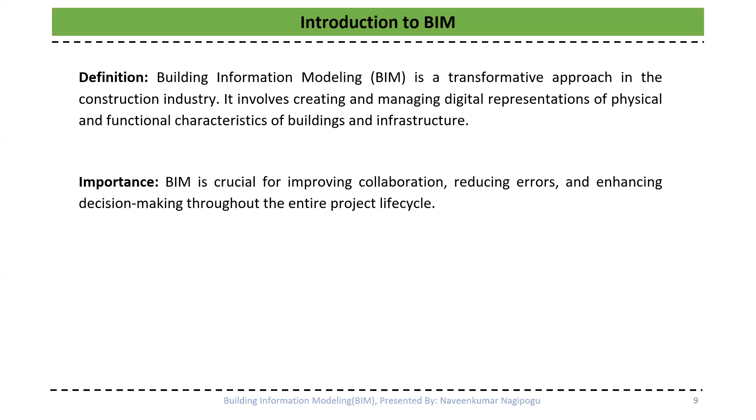So now let's come to the evolution of BIM. How did BIM get started, when did it start, and how is it getting adopted by the industry? In the 1970s itself, the word BIM was coined, it got started. But in the early 2000s, the popularity came. Why and how? Because of the intelligent 3D software, Revit. Autodesk people really did so many improvements to the Revit software. So many people adopted Revit as a building information modeling software, and they started working on it and were able to see the results. There are so many other software I will show in later slides, but it's because of intelligent 3D modeling software that BIM got popularized.

BIM is actually a subject, remember. BIM is a subject and a process which makes use of so many tools, technologies, etc.

And now BIM is widely adopted by so many countries. India is the pool of talent when it comes to BIM. You check out North America, UK, USA, UAE, London, and Sweden, the Nordic countries, Ireland - everywhere, Indian people are working on BIM projects.

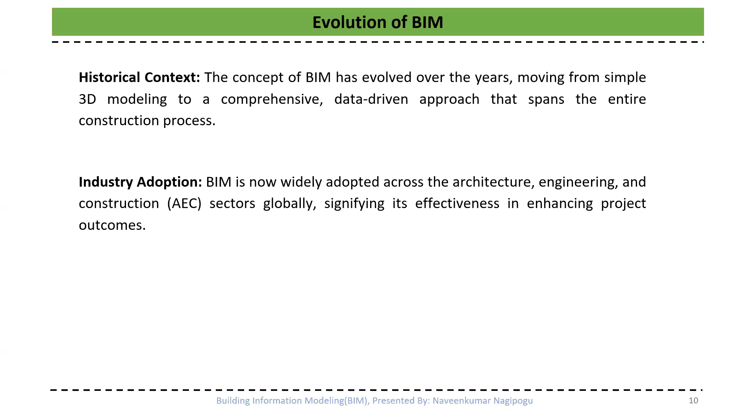Let's move forward, I will explain more. When it comes to key components, BIM is a process - what's included in the process? 3D modeling. The first job in developing the 3D model for BIM is to figure out what the project is, what the requirement of the project is, and who are all involved in the project. After that, we start working by building a 3D model. That is the first thing, the 3D modeling is the very first step.

Once the project is accepted and the project proposal acceptance is received, then comes collaboration. People will be able to work together on a single shared file, no matter if you are in Andhra Pradesh, Telangana, Kolkata, Delhi, BITS Pilani, or IIT Bombay. You can work on a single shared file so you can see what other people are doing, and also sync your live changes to the model with the other team members.

Data management, simulation and analysis, documentation - when it comes to documentation, it is once again very important. In a traditional way, how do people generally do documentation? Typing in a Word file, extracting Excel sheets, drafting and designing on CAD - so much time consuming. We are in 2024, and 2024 is also going to end, we'll be jumping into 2025. We should be equipped with the latest tools and technologies. It's a very sophisticated world now. Hyderabad is not the same as it was 30 years or even 10 years ago. You are able to see the change, right?

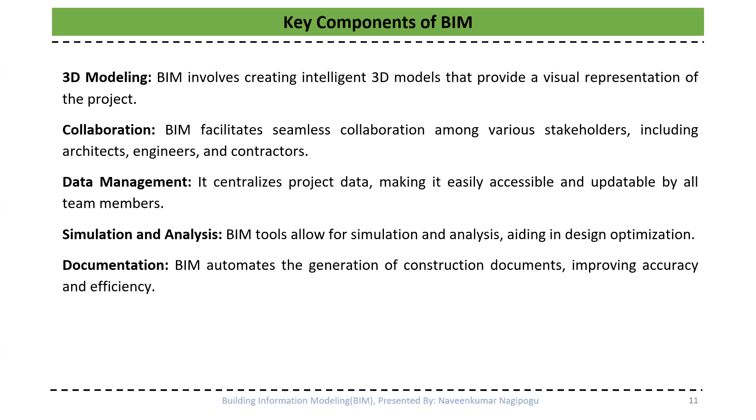See, BIM is also about the time period. It has been evolving and evolving. Let's move forward.

When it comes to BIM and architects, architecture people—say, diploma in architecture or a bachelor of architecture—generally they are designers by inbuilt design. They work with a lot of tools and technologies. Primarily they work with CAD, Figma, Photoshop, Rhino, Revit, and many other tools in the market. BIM helps them do their work in much less time, using the latest tools and technologies like generative design.

We just have to give the inputs: how I am expecting the inputs, what are the constraints, what are the terms and conditions. Once you give the data, the system will generate the layout—this is your hall with this much area, this is your bedroom, this is your puja room, and this is the elevation, this is the utility area, this much space is occupied by furniture, etc. Automatically it will pop up, and we can modify accordingly as per our convenience.

That is design optimization and visualization.

We are all human beings, right? There is a difference between reading and understanding, and watching and understanding. Any doubt?

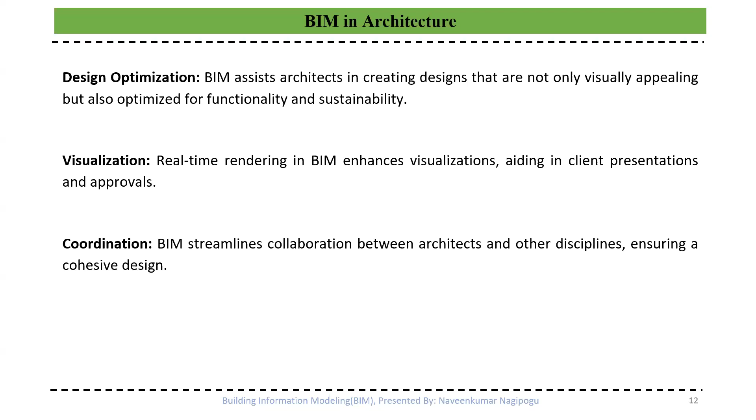When it comes to engineering, the same thing applies. We have scope for structural engineers, mechanical, electrical, plumbing engineers, and sustainable professionals in the case of energy analysis.

When it comes to construction, project planning—what do you know about project planning? I hope you might have studied it in your BTech civil engineering. I also studied it, but unfortunately did not learn any planning software. The traditional software is Microsoft Project, a very nice software, but I couldn't learn it in academics. Now every day I see schedules prepared in MSP, Microsoft Project, Primavera P6, Asta Power Project. Once you jump into the industry, you will learn everything—no issue at all. But my point is, you should have exposure.

What is industry? What is there in the industry? What skills are needed to get into the industry? This is very important—otherwise there will be no difference between a knowledgeable person and just a graduate.

Let's move on. Cost estimation—there are so many tools and technologies to extract the cost within a few simple clicks. Then site logistics—you can track everything happening at our site.

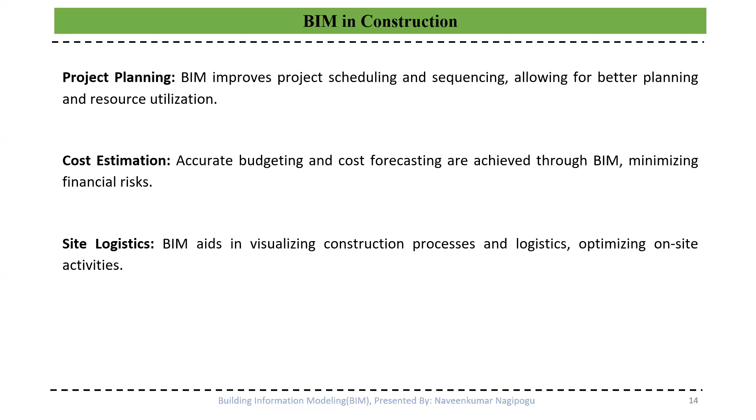Facility management is a very important area and it is coming up. Facility management is nothing but—once you plan, design, and construct a building or built asset, people are going to occupy and live inside that building or asset. Every day they should feel fresh air, they should breathe nicely, they should have proper ventilation, heating, ventilation, and air conditioning, and they should not feel suffocation. Their fan in the room should work well, the air conditioner should work well, the refrigerator, etc.—so we can track each and every asset and improve performance in terms of operation and functionality. This asset information modeling or facility management comes under some chapters, I can say—somewhat advanced. But first BIM comes, only then facility management comes.

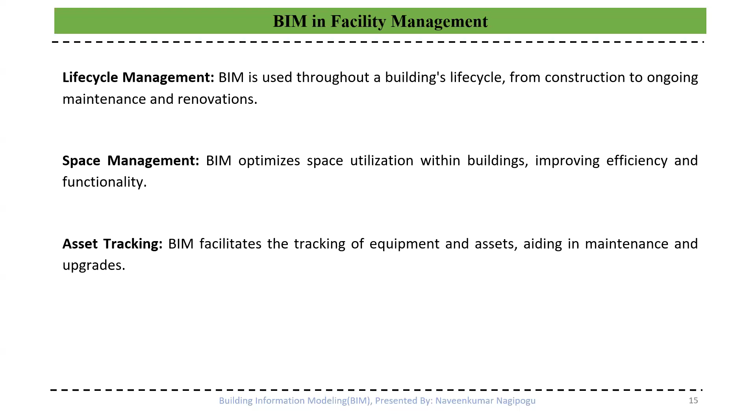Now let's come to our favorite topic: career opportunities. In our BTech civil engineering or architecture, there are so many specializations—like structural engineering, geotechnical engineering, rock mechanics, transport engineering, pavement engineering, marine, etc. There are so many things.

So if you enter into BIM, you can work with so many disciplines at the same time, because BIM is everywhere, in every branch. If you want to get into buildings and infrastructure, you can take up Revit. If you want to jump into infrastructure only, then you can take up Civil 3D or InfraWorks projects. There are so many things—I will show in the later slides.

Primarily, the one who wants to start their career in BIM will first start with the role of BIM modeler. The job of a BIM modeler is the company will give you inputs in a PDF or a 2D CAD, and you have to develop a 3D model out of that. Typically, the job involves developing 3D models and documenting them, extracting drawings, sections, elevations, details, schedules, quantity takeoff, etc.

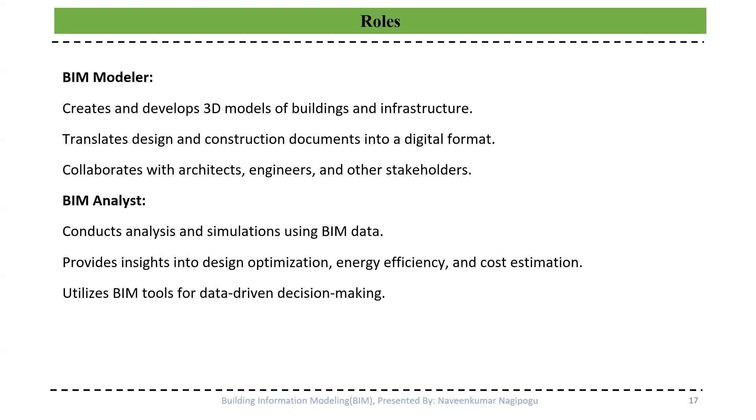Then we have a BIM analyst, a role that comes after some experience. We have a BIM manager. If you want to become a BIM manager, you should have experience as a BIM modeler, BIM engineer, BIM coordinator. BIM manager is a top role. It depends on the company how they want to name your role based on their standards. Some call it BIM director, BIM manager, BIM delivery head, digital delivery head, etc. In short, the BIM manager oversees the implementation of BIM on projects.

Then there's the BIM coordinator. This is the person who actually coordinates with so many disciplined people, so many teams, like architecture, civil, interior, mechanical, electrical, plumbing, fire protection, instrumentation and controlling. So many, so many teams are there.

Now let's come to BIM technician. This is one of the very popular roles when it comes to multinational companies. After some period of time, once you get experience in the companies, you will be hired as a BIM technician at multinational companies. Right now, I'm working in one of the multinational companies where the head office is in Singapore and branches are in India, Saudi Arabia, Dubai, Indonesia, Malaysia, and Canada, and I am going to join a company with presence everywhere across the globe.

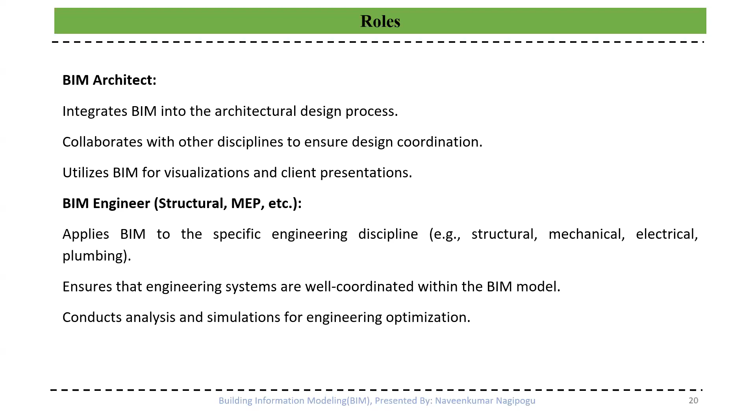The BIM project manager we have seen, and the BIM researcher - if you are interested in research and higher education, you can pursue your higher education in BIM, a Master of Science in Building Information Modeling. You can explore and do so much research.

Now, BIM educator and trainer. Let me tell you, the beauty of the civil engineering industry is if you acquire the skills, you can teach those same skills to fellow students or friends and earn money. It's like a part-time job - that's what I'm doing now. I mostly take evening classes, webinars and workshops, and charge accordingly. You can also simply sit at home and provide plans, sections, elevations for your villagers, for your city people. It's all about the network, okay?

Let me tell you how I actually got interested in my career. Me and five of my friends joined a company together. We got a very good command, so we helped each other, built on our skills, applied for multiple companies, attended interviews, cracked them, and switched companies. Our salary got doubled. This is how generally we grow in the corporate world. Once you start the career, you will get to know everything - you just have to learn in office, and then you will learn automatically everything.

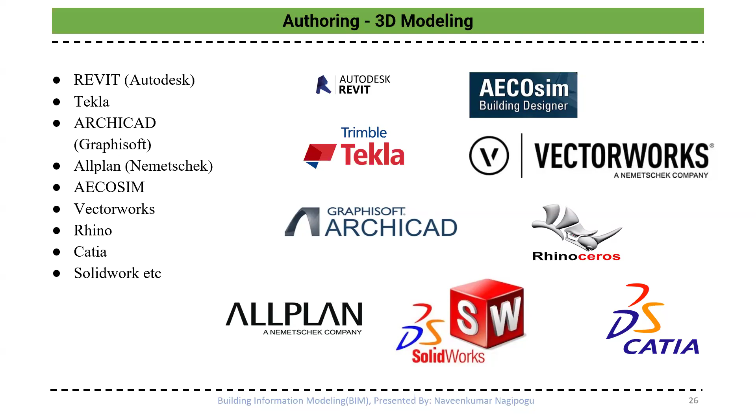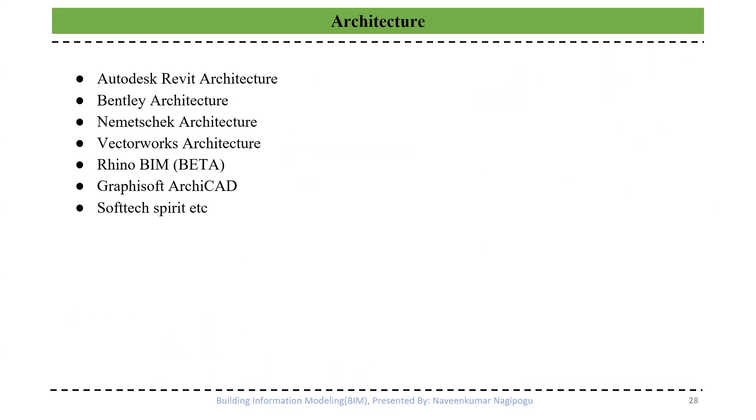When it comes to architecture, we have Autodesk Revit Architecture, Bentley architecture software, Nemetschek, Vectorworks, Rhino, Graphisoft - many options. Now for structure, the same thing - earlier we only knew STAAD Pro and ETABS, but now there are so many tools for structures.

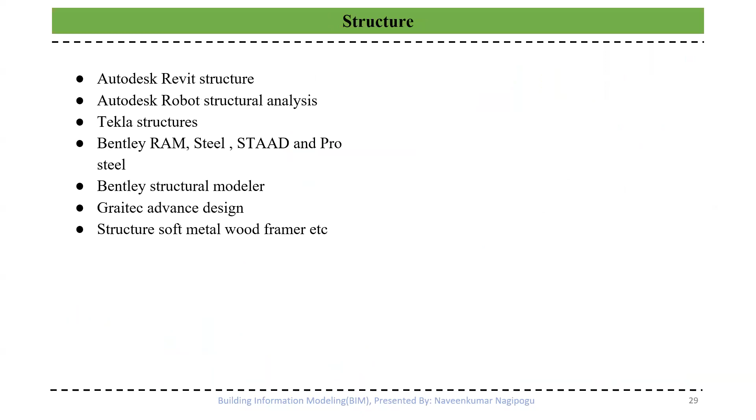When it comes to mechanical, electrical, electronic and plumbing, we have so many tools here too. And Revit is always at the first rank because people use it in such a way that the entire project is built on Revit.

For estimation and simulation also, we can use various software. So in our upcoming BIM Revit architecture course, we are providing Autodesk Navisworks training as a bonus, particularly for clash detection and coordination.

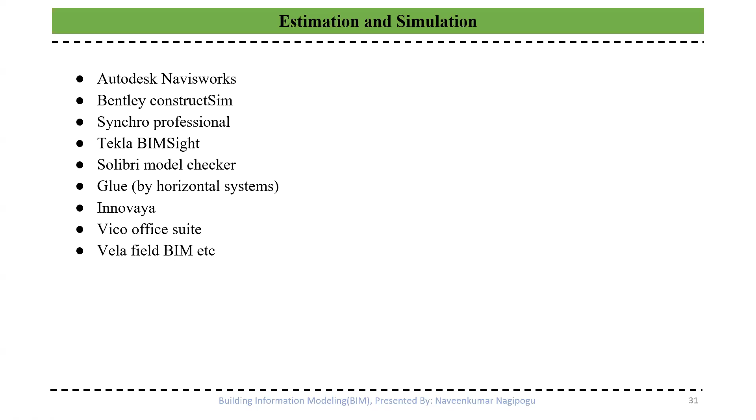Let's move forward to sustainability. Sustainability is trending - if you become a sustainability consultant or expert, you can earn a lot and grow in the corporate world. IGBC, LEED, GRIHA - so many certifications are there, and there are so many tools in the industry to help you.

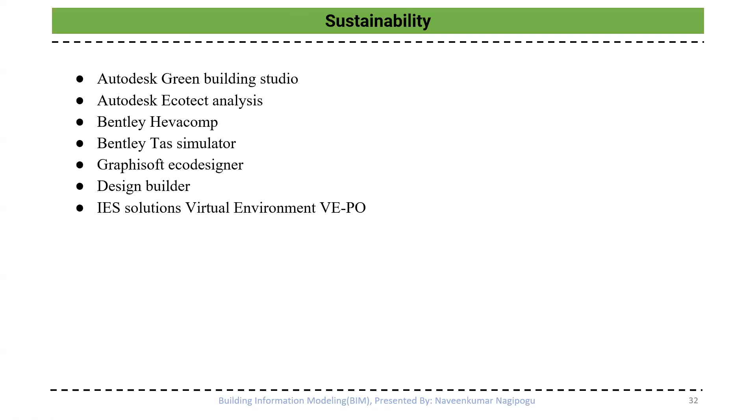There are tools from Autodesk, and when it comes to facility management, there are so many things available there too.

With this, I would like to give a break to our webinar's core content on career in building information modeling. I hope our session is making sense, and I hope you understood and learned something out of this session.

Is it making sense? Can anyone tell me? Am I audible?

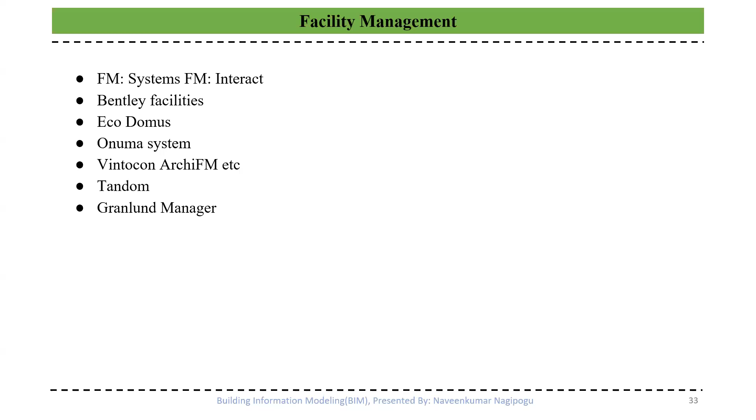Because of this motto behind the construction industry, we started this platform, and we deliver so many webinars, workshops, etc. Without jumping into the prices of the courses, I will just show you the syllabus of the course which we prepared for BIM and Revit architecture and Navisworks.

Are you able to see my page, construction leaders? Yes sir, great. Let me throw some light on what we are going to cover in our upcoming online live course on BIM, Revit architecture and Navisworks.

This is the introduction to construction leaders, you don't have to worry. Let's go to our particular course. This course name is BIM and Revit architecture plus Navisworks as a bonus. This will be for 8 weeks, that is 2 months. We will take evening classes, and we'll fix the timing as per the students' availability and the trainer availability.

It's completely flexible, okay? It's not like very professional training conducted by some MNC company or etc, nothing like that. It is in between us, and it will be delivered in such a way as you wish, it's very friendly. The main motto is building a skill, that's it, okay, not giving a certificate. Of course we will be giving certification also, but skill is very, very important.

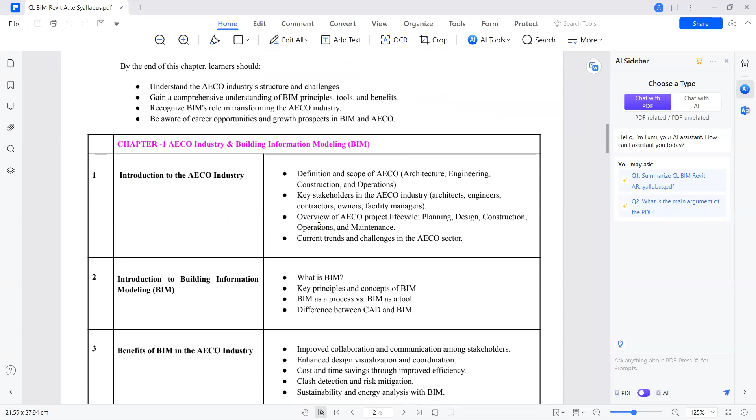So the first thing in our course, we'll jump into learning about our industry, the architecture, engineering, construction, and operations industry. How is our industry, what is our role in the industry, who are the stakeholders, the contractors, owners, developers, engineers, how they work in the industry.

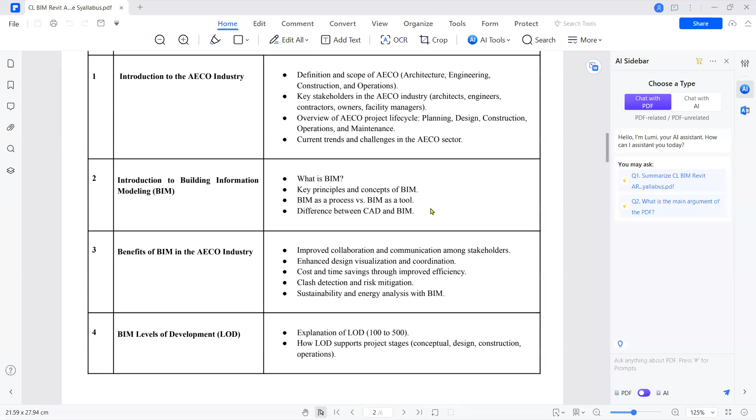After that, we'll give the introduction to BIM. What is BIM? The principles, concepts, BIM as a process, difference between CAD and BIM, how to improve the collaboration.

Let me tell you, if you are someone who alone learns the Revit tool, CAD or SketchUp Pro, and go into the industry, you cannot grow in your career without having a subject knowledge. In our case, the subject knowledge is BIM. BIM is a subject, okay? First you have to understand that.

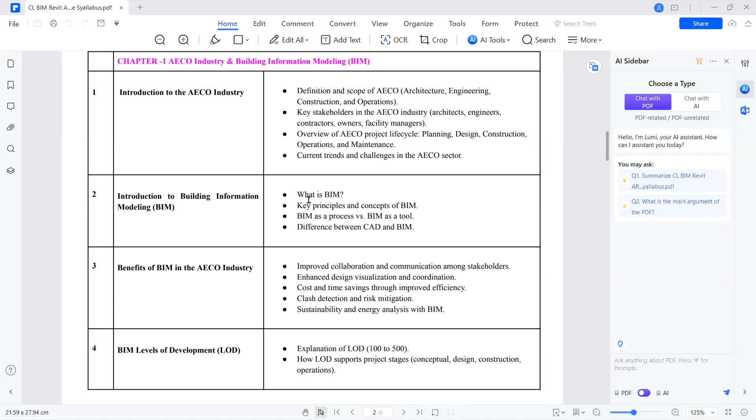We should not jump and start 3D modeling in Revit. No, that will not make any sense. In your whole career you will just work as a BIM modeler only. If you just want to become a BIM modeler, coordinator, BIM manager, specialist, etc., you should have knowledge. First of all, what is BIM and why we are doing it, what is the difference, and how we can improve our cost savings, time savings.

And here you can see clash detection. Clash detection comes under the Navisworks software. So we will be covering that one also.

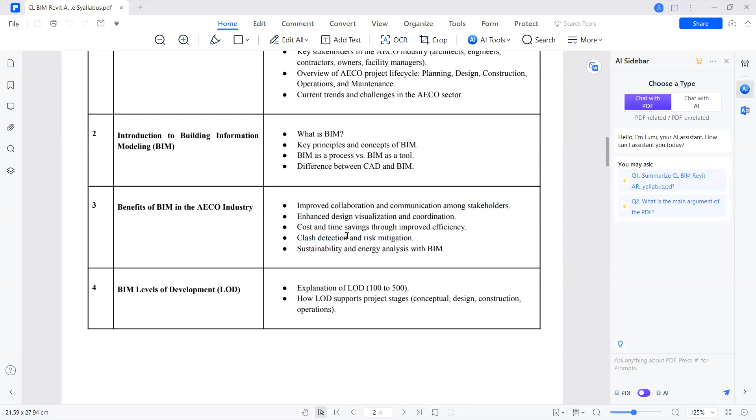Generally, to enter into the BIM industry, you need the Revit software, the modeling skill. If you have Navisworks also, that is very, very well and good. People will take you without having any doubt and without having any question. So that is the intent why I included Navisworks as a bonus here.

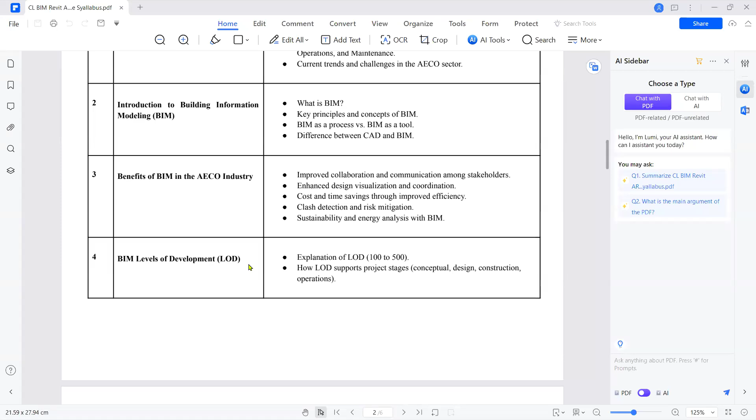And BIM levels of development. So this is very technical. Once we start the course, then we will be coming to know it. Then BIM dimensions and their applications, BIM standards and guidelines.

Remember, you ask any 3 years or 4 years experience person in BIM, sometimes 10 years experience person, they will not say anything about standards because they are just working on Revit, they are not doing BIM. If you are a BIM professional, you should be able to talk about standards also. You know, National Building Code, National Fire Protection and Alarm Code, Indian Road Congress, and AASHTO. There are so many standards. Like that, for BIM also, we have a standard. So we will be covering about that.

Then software tools for BIM, the overview of Revit, Navisworks, and some other softwares if needed. Then career opportunities. This is about BIM.

Now let's come to our Revit architecture training. Whatever you are seeing in front of your eyes, the building, the wall, the door, the lighting fixture, the bed, the chair, the cot, the furniture, everything, everything we are going to build.

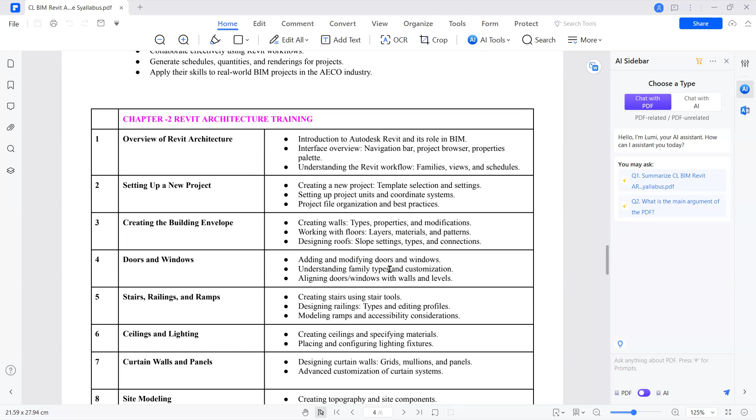What is Revit? Why we use that? New projects, setting up a template, setting up the project properties, layers, materials, doors, windows, families, staircase, railing. Let me just open the Revit software.

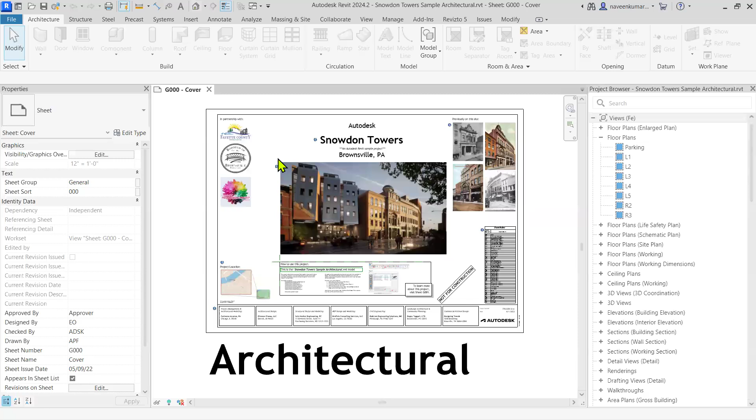Here you can see. Are you able to see my Revit screen? Yes sir. I can say when compared to other softwares, when compared to AutoCAD also, Revit is a very, very easy software.

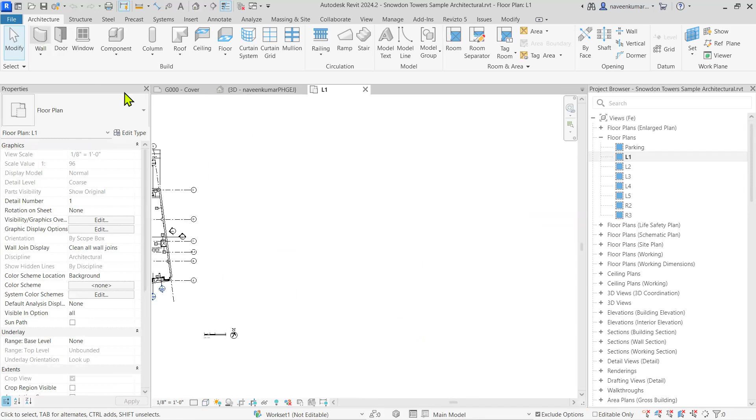And whatever we do in Revit, everything is 3D, three-dimensional, X, Y, and Z. It is so easy in such a way, you just have to take the particular commands, and these are all very well known, right? You know wall, how do you actually make a wall, etc.

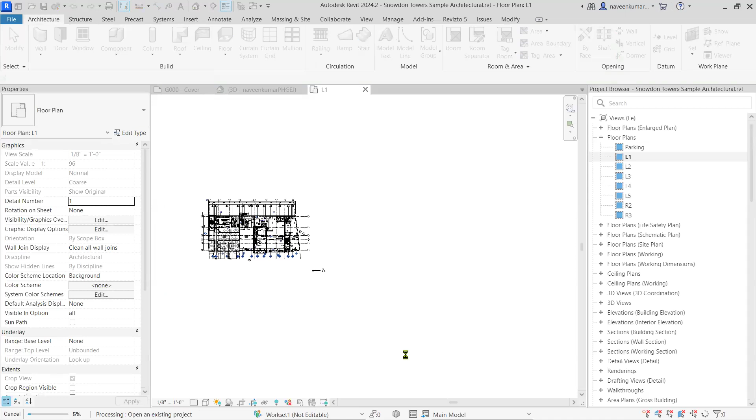Let me just open any particular new project. Just let me take architectural template. The project will pop up. And if you have any doubts, you can drop them on the chat box, and you can ask me also once I demonstrate the Revit.

Here you can see we have wall, door, window, components, column, roof, ceiling, floor, railing, mullion, ramp, stair, everything is here only. If you go to structure, we have I-beams, walls, columns, structural connections, footings. When it comes to steel, we have connections, bolts, welding, etc. When it comes to systems, mechanical people, electrical people play with the systems. There are so many things.

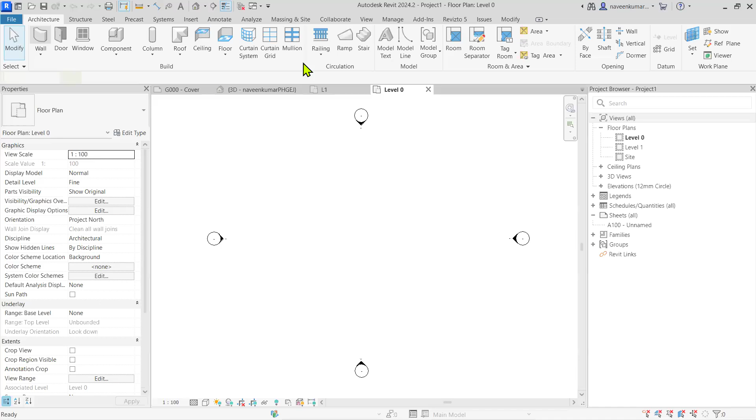But our scope will be this architecture, some of the tools in the structure, then Navisworks. Of course I opened the Navisworks software also, but it's somewhat advanced. First you have to understand Revit. You know how easy it is to develop a model in Revit?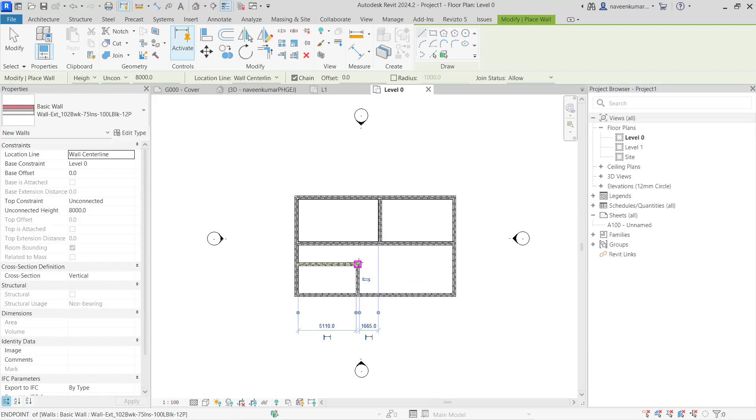Simply just say, for example, this is a wall. For example, I want to build a 2 BHK home. Let me just build a 2 BHK home. So those are the bedrooms. Let me tell you, this is the kitchen for me, and this is a puja room for me.

And let's take a door, a double door. Let's take a double door, and let's place a double door here, just like that. And let's take a single door, just like this. And we can edit everything as our wish, okay? Simply we can edit just like this.

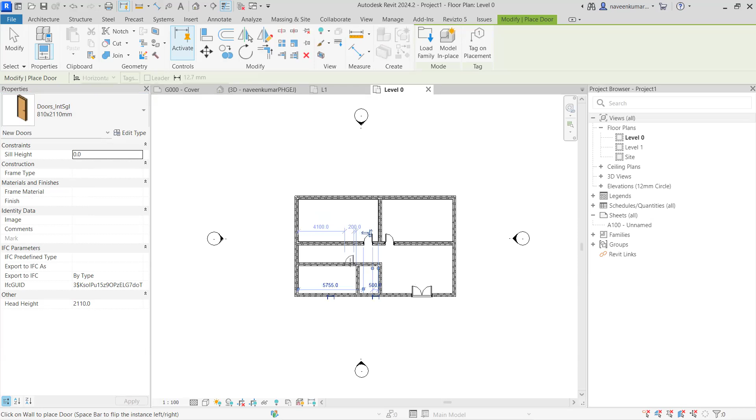So when it comes to kitchen and puja room, I don't want to have a door. I want to simply have an opening. How can we do that? Simply we can go here. Here you can see wall opening.

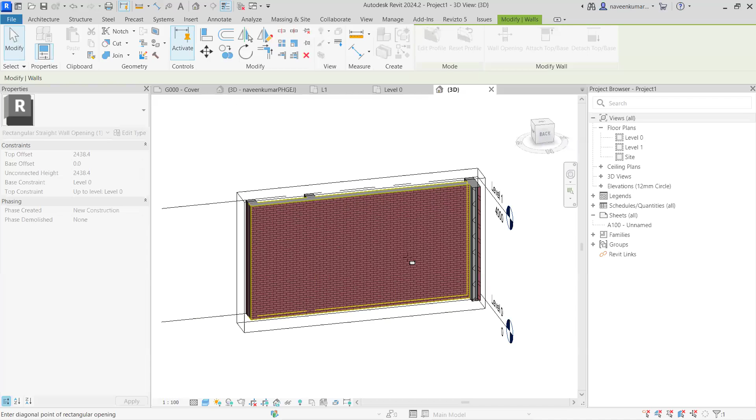Simply just create a wall opening just like that. Here also simply create a wall opening. So this is a very big opening, okay? We don't need this much big opening for our kitchen. Let's keep until this height only.

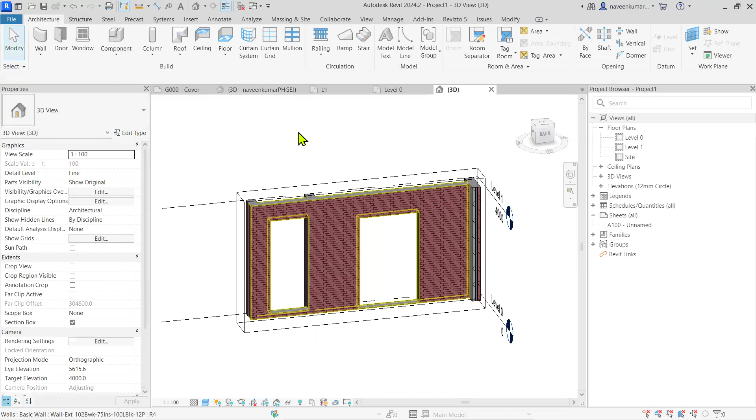Now let me go to this project. So if we go to 3D here, we can see so far whatever we built. Okay, so this is our 2 BHK. Done. We are done with the 2 BHK.

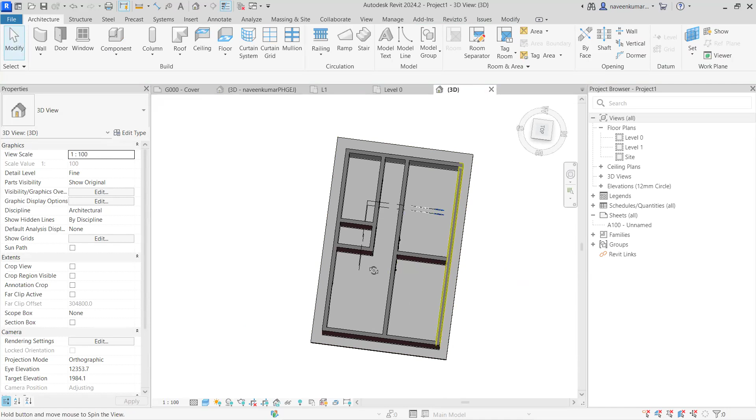Okay, if you want to give a floor, simply select. So you can just model it, and here you got your floor. That's it. And you want a roof or ceiling here? Fine, we can do that.

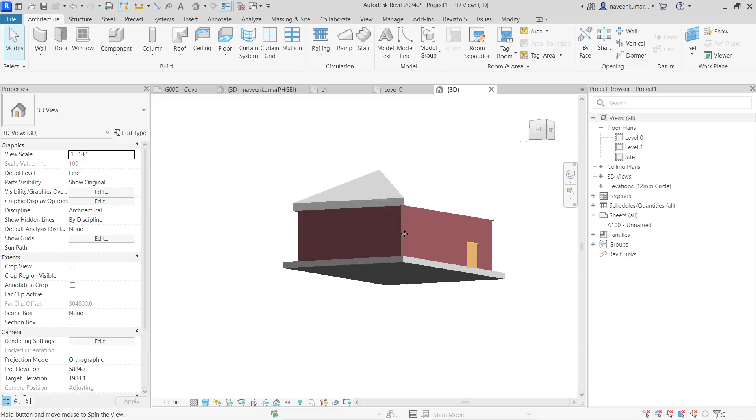Let's come to the roof, and let's just make our roof here, just like that. Attach. Yes, this is our roof. No, you don't want this kind of roof. You want a flat roof only. That's fine. Let's give the slope as 0, and you will get your slab.

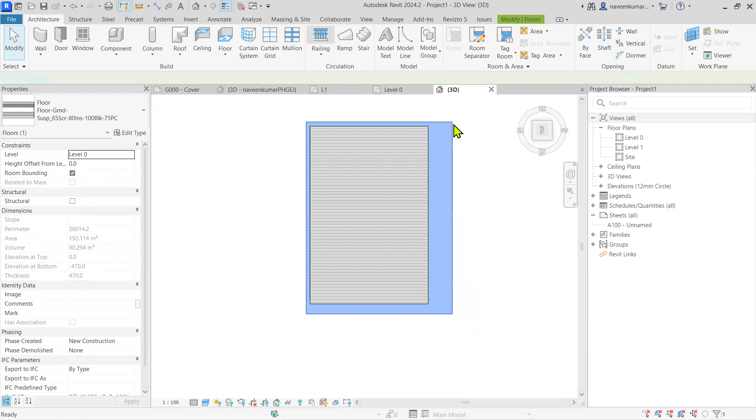So there are so many things, okay? Slab, roof, etc. And what you want to do, you want to just edit the boundary, and you want to have a railing here. We can do that. Simply come here, take a railing. Just you want railing here. Done. The railing has come.

And say, for example, you want to have the same thing for the next floor also. So simply in levels, I will go to next level, and I will just paste. We got next floor also.

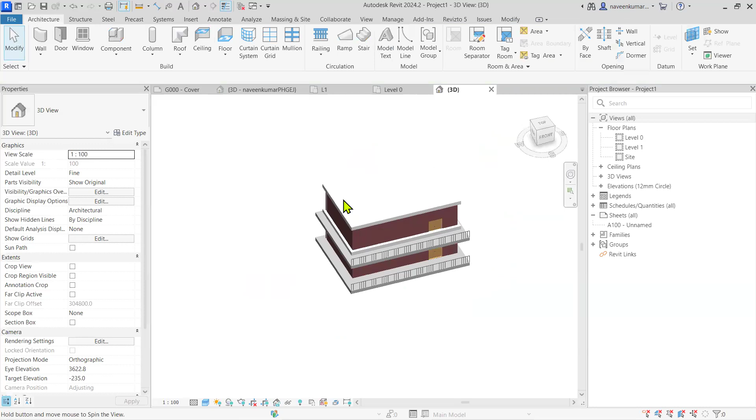Now what to do? I want staircase also. Let's do that. Here we have a staircase. Simply just like this. That's it. We got our staircase.

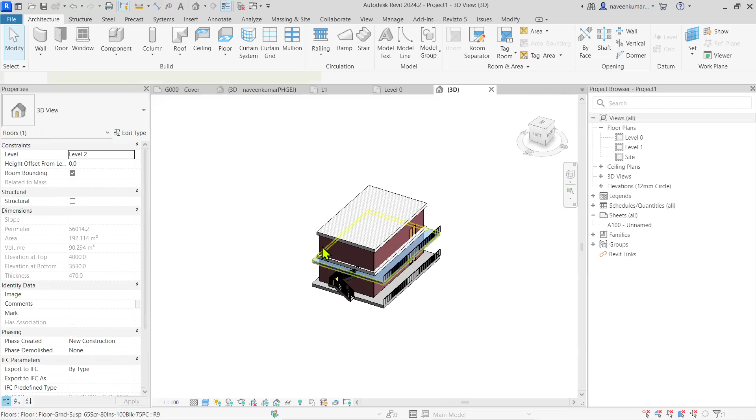See, in this very little time, I am showing entire home, okay? And imagine, if you learn the whole Revit tool, how excellent work you can do. So here we can create openings, etc. We can do so many things here. I'm just very curious to show you the excellent work we can do with the help of Revit. So this is a 3D modeling or authoring tool, I can say.

Let's come back to our course. So whatever I did so far, more than that, whatever I just shown, that is 5% I can say. We are going to learn so many things in our course, in our upcoming course.

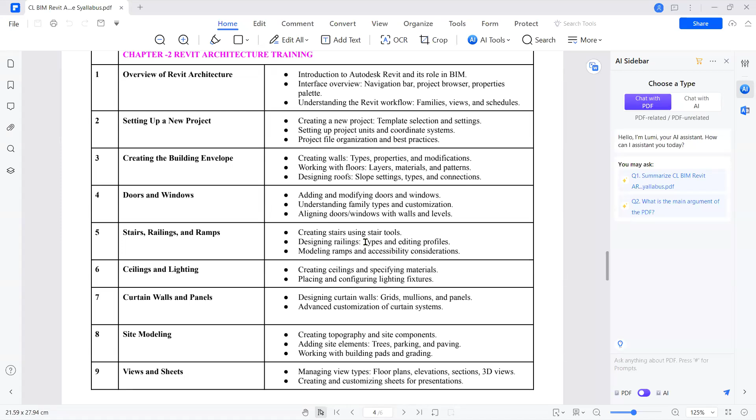This is about the course. So I am done from my part. Now the thing is, what is the price? What is the price of the course?

Are there anybody who already inquired about the price in some other institutions, in some other companies about BIM training? Anyone from the audience? Did you inquire the fee? Yes, Akash Kukula. You can tell the fee. If you inquire the fee outside, you can just tell.

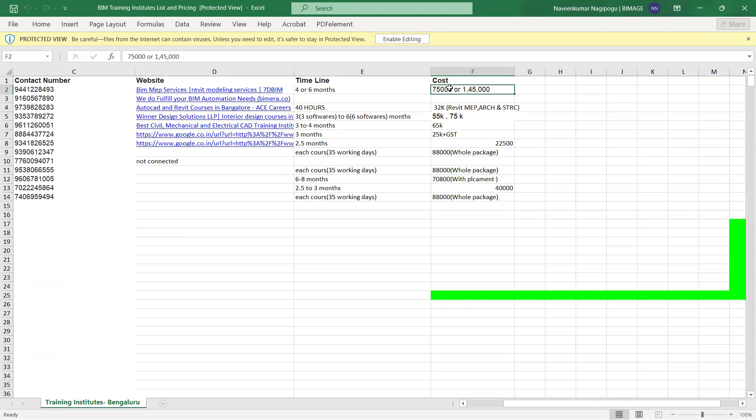So let me, here you can see, don't take any screenshots, okay. This is confidential. And you can see, this is the cost of the courses they are charging for packages.

Okay, by keeping this in my mind, actually, we did so many changes to our framework, and we tried our level best to make this particular BIM Revit Architecture Navisworks course as much as possible affordable. As part of that, we come to a price conclusion. Let me just show you the pricing. Okay, I hope you're able to see my PPT now, right?